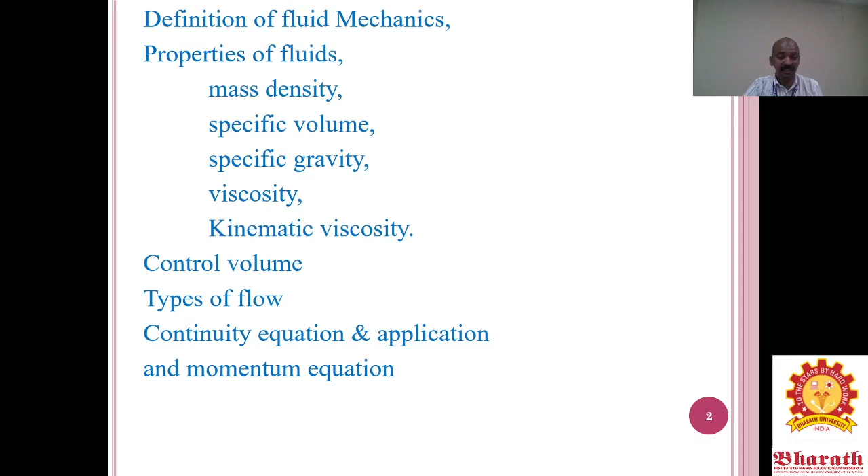Definition of fluid mechanics, properties of fluids: mass density or weight density, specific volume, specific gravity, then viscosity, kinematic viscosity. Based on that we have to do some problems also. Then we discuss the control volume, then flow, types of flow rate, then the continuity equation, and its applications. Based on the applications there will also be some derivations. Then we have to do many problems on this topic, and finally we discuss the momentum equation.

So first we discuss what is the meaning of fluid mechanics. It is a branch of science which deals with the behavior of a liquid or gas in any form, liquid form, gaseous form or semi-solid form, at rest as well as in motion. The main three branches of fluid mechanics deal with statics, kinematics, then dynamics.

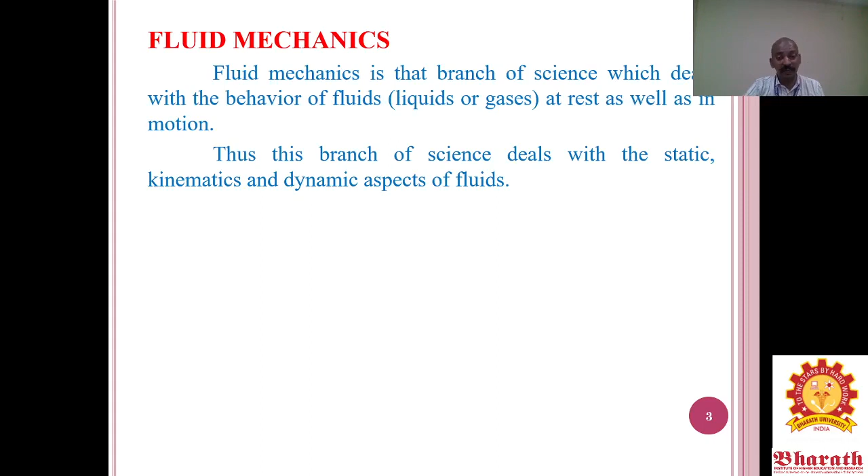Statics means the fluid is at rest. For example, the dam is closed; that is considered fluid statics. When the dam is opened, and we don't consider the pressure, that is fluid kinematics. If the pressure force is considered, that portion is called fluid dynamics.

So normally dam water in a closed containment is fluid statics. Next, the dam being open means fluid kinematics. Then the last one is fluid dynamics. That means the water tank with the tap open. In that water tank, at the outlet from the tank, there is one vertical pipe. The top of that pipe is open to the atmosphere.

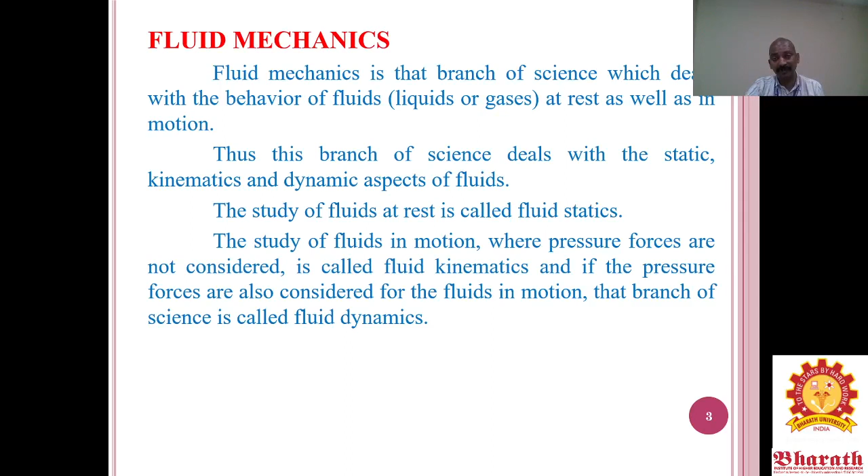So pressure is also considered. If you consider the pressure for that liquid, that is called motion, and that is called fluid dynamics.

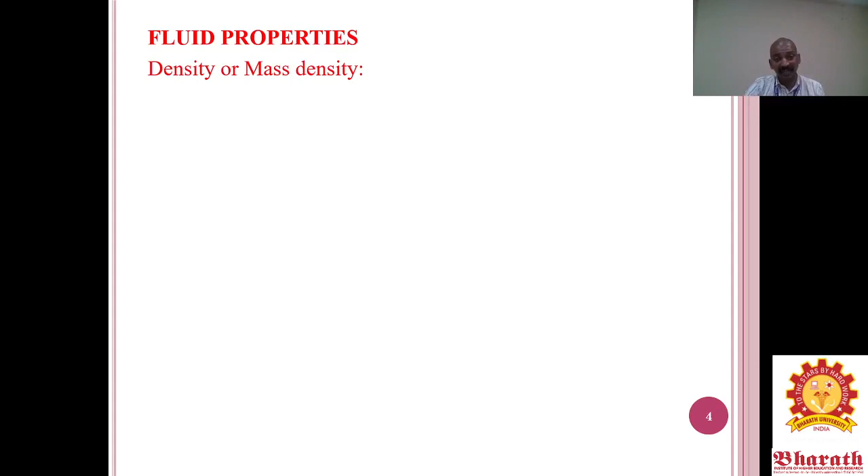The next one, we discuss the fluid properties. First we discuss density or mass density. It is defined as the ratio between the mass of the fluid to its volume. You have to check how much capacity is available in that liquid. Based on a 1 meter cube volume, how many liters will be available; based on that we find it. That is called mass density.

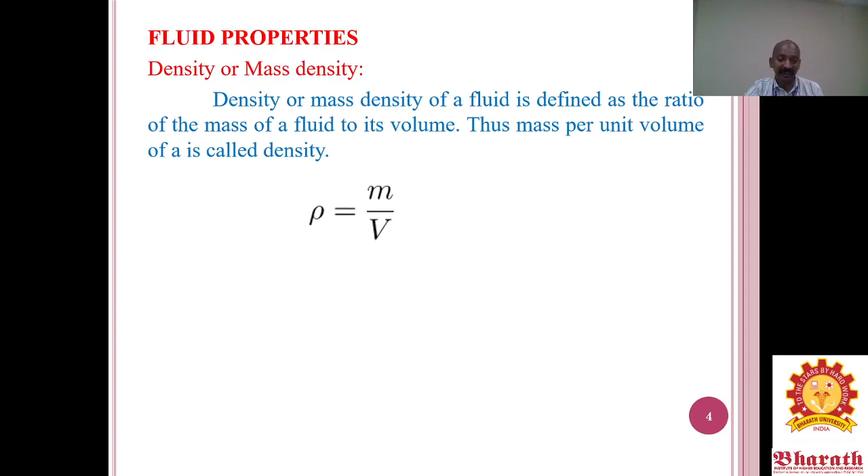It is denoted as rho. The unit of density is kg per meter cube. In formula form, density is equal to mass by volume. Mass is m and volume is v. Density is denoted as rho: rho equals m divided by v. So the SI unit for mass density is kg per meter cube.

Any fluid, in liquid or gaseous form, has some density. For density we take a standard liquid; we consider water as the standard liquid. The density of water is 1000 kg per meter cube. So how is 1000 kg per meter cube calculated?

You have to consider the volume: length, breadth and height. Consider 1 meter length, 1 meter breadth and 1 meter height. Then the weight of that water is 1000 kg. For 1 meter cube, the weight of the water will be 1000 kg. So the density of water is 1000 kg per meter cube.

Likewise, consider any liquid, either petrol or diesel. In petrol bunks they have rules: you have to check it daily and update the density value in the machine.

Okay, so sometimes it is 814 or 818 or 838 or 840, like that the petrol density value will be available. Like that the diesel density also will be changed. So here we consider the liquid form.

The next one we consider for the gaseous form. For gas, the standard fluid we have to consider is air. So the density of air is 1.27 kg per meter cube. Okay, so the dimensional form will be discussed later. Already you studied it in the physics subject in previous classes.

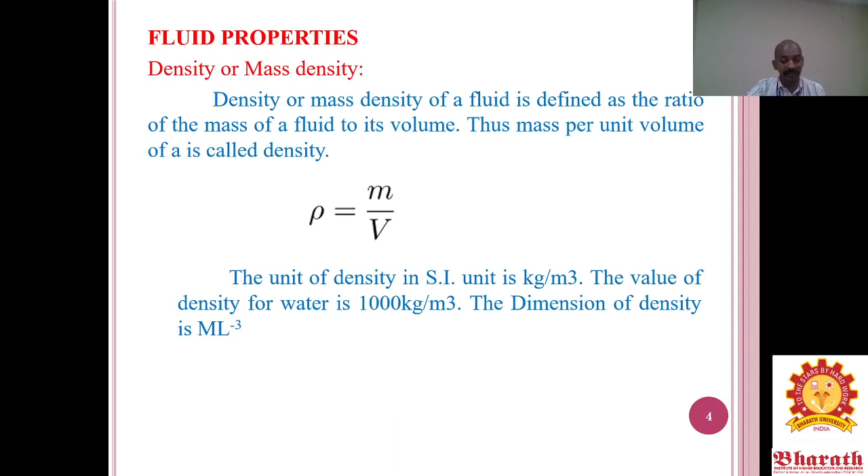Okay. Then next we have to discuss the weight density. It is a ratio between the weight of the fluid to its volume. So how much weight will be available per unit volume. Based on that, W is equal to rho into g, like that directly it will be written. So rho is the density. Density means mass by volume.

So mass of the fluid into gravity divided by volume of the fluid. Okay, so it will be denoted as W: weight density is equal to weight of the fluid divided by the volume of the fluid, that is equal to mass of the fluid into gravity divided by the volume of the fluid. The unit: weight is Newton, mass is kilogram, into gravity that will be converted into Newton, divided by meter cube.

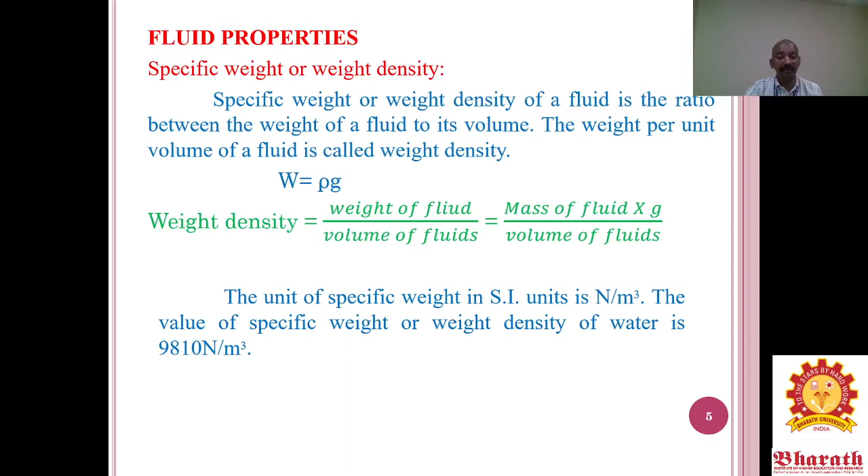Normally the weight density of water is 9810 Newton per meter cube. Then next one is specific volume. It is the volume occupied by a unit mass of the fluid. So it's the opposite of density, 1 by density. Normally density means mass by volume, but specific volume is volume by mass. So 1 by rho. The unit for this is meter cube per kilogram.

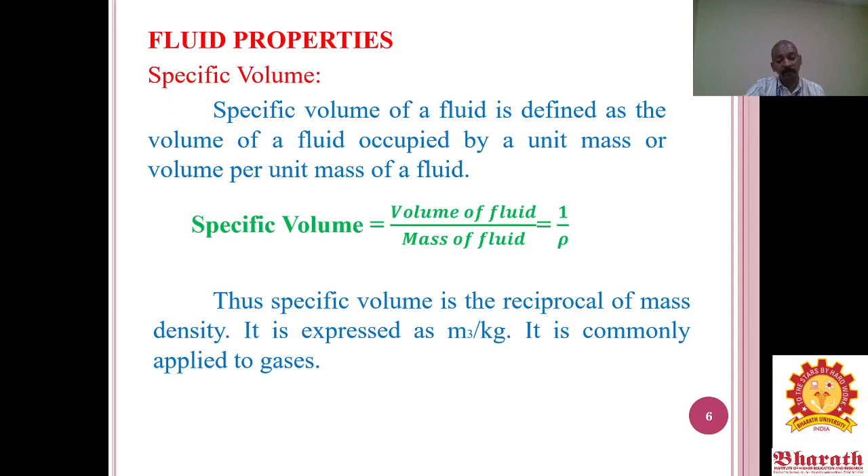It will be applied only for gas. Already I told it. So density of air means 1.27 kg per meter cube. Okay, so like that also you have to consider.

Next one, specific gravity. It is a ratio between the weight density of the fluid to the weight density of the standard fluid. It is not compulsory to use weight density; you can consider the density of the fluid to the density of the standard liquid. Already I told it, the standard density is 1000, we consider water. It will be denoted as S. S is equal to density of the fluid divided by the density of standard liquid.

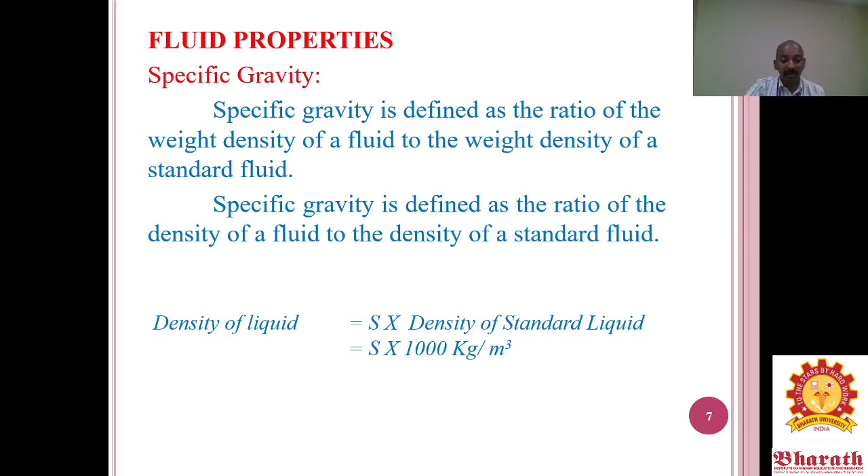So here we have to do the cross multiplication. Density of the liquid is equal to S into density of the standard liquid. The standard liquid we consider as water, and the density of water is 1000. So the density of the liquid is equal to S into 1000 kg per meter cube. Based on that we will do one problem.

In this problem, calculate the specific weight, density and specific gravity of 1 liter of a liquid which weighs 7 Newton. First we have to write the given data. Volume is equal to 1 liter. Weight is equal to 7 Newton. Here we have to calculate specific weight, density and specific gravity.

Okay, so first we calculate the specific weight, denoted as W. W is equal to weight by volume. The weight is given as 7, then divided by the volume, which is given as 1 liter. You have to convert liters to meter cube. So 1000 liters is equal to 1 meter cube.

Okay, so 1 meter cube is equal to 1000 liters, which means you have to do the cross multiplication: 1 liter is equal to 1 by 1000 meter cube. As I already told you, you have to consider the length as 1 meter, breadth as 1 meter and height as 1 meter. So the total volume of this one is 1000 liters. Based on that, W is equal to 7 Newton into 1000 by cross multiplication, 7 into 1000. Finally we get the specific weight equal to 7000 Newton per meter cube.

Then second, we have to calculate the density. We already know that specific weight W is equal to rho into g. Here we have to calculate the density, so by cross multiplication, rho is equal to W divided by g. So 7000 divided by g, gravity 9.81. Finally that is equal to 713.5 kg per meter cube.

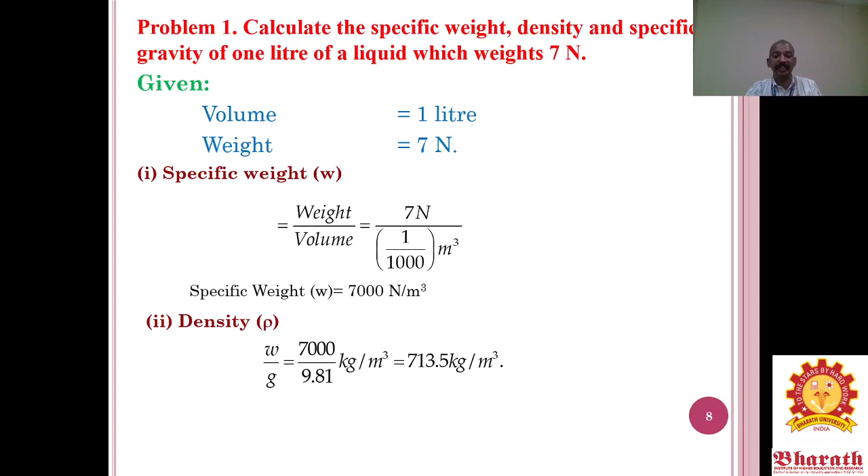Then third, we have to calculate the specific gravity, which we already discussed. Specific gravity is equal to density of the liquid divided by the density of the standard liquid. Here the standard liquid is water. We already found the density of the liquid, 713.5, and the density of water is equal to 1000. So 713.5 divided by 1000 gives the specific gravity of the liquid, 0.7135. It has no unit, because kg per meter cube divided by kg per meter cube cancels out.

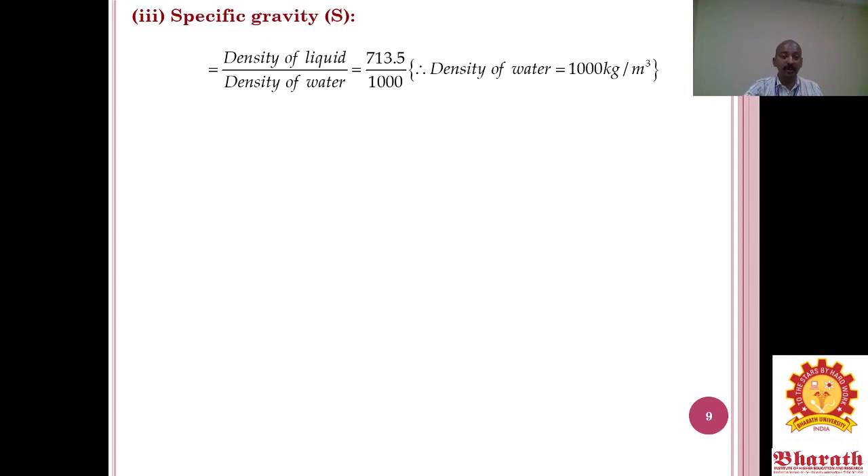First you have to write the given data. The volume is given as 1 liter, which we have to convert to meter cube. 1 liter is equal to 1 by 1000 meter cube, finally converted into 0.001 meter cube. The other data, specific gravity, is given as 0.7.

First we have to calculate the density. The specific gravity is given. Specific gravity of the liquid is equal to density of that liquid divided by the density of the standard liquid, which we consider as water. So 0.7 is equal to density of the liquid divided by 1000. By cross multiplication, the density of the petrol is equal to 0.7 into 1000, that is 700 kg per meter cube. Then the first one is over.

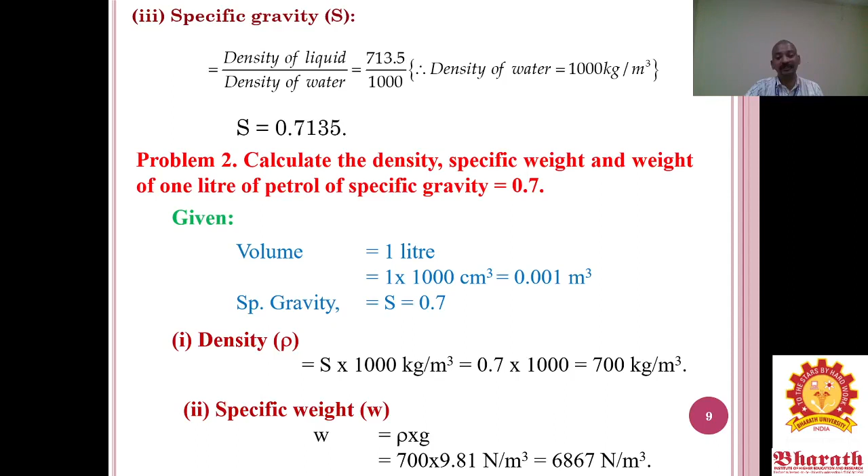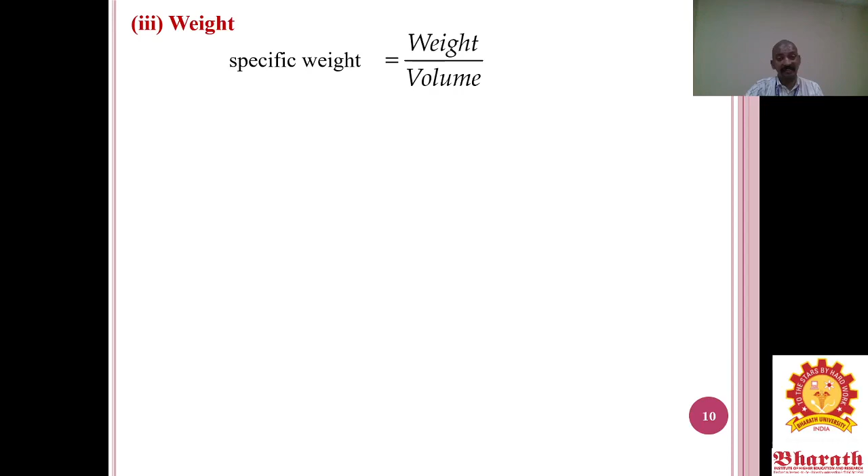Next we have to calculate the weight. How do we calculate the weight? We know the specific weight is equal to weight by volume. The volume is given as 0.001, and we already found the specific weight, 6867. So finally the weight is equal to 6867 into 0.001.

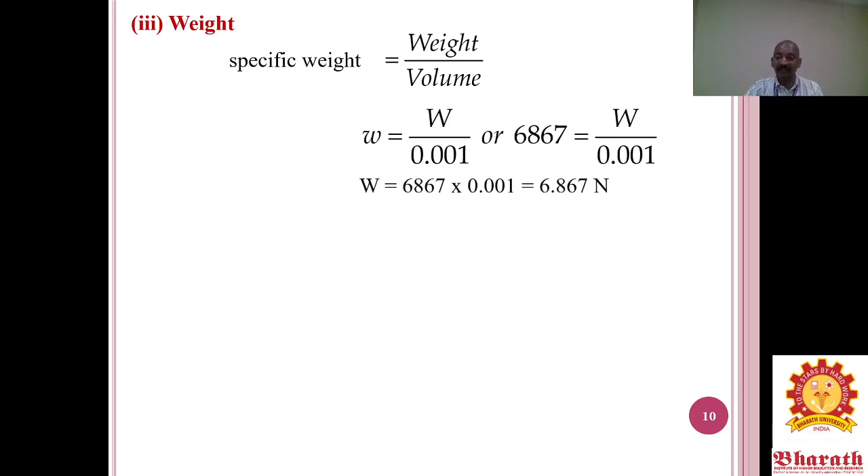Finally, we get that 6.867 Newton. So we complete that one.

Next one, we have to consider the viscosity. Viscosity is defined as the property of the fluid which offers resistance to the movement of one layer. So you have to consider that, based on the layer, the fluid will be added or reduced. So how much distance will be displaced, that will be mentioned as dy. The particular portion will be mentioned as u, so it will be u plus du. I will be showing it in the figure, and based on that we have to calculate.

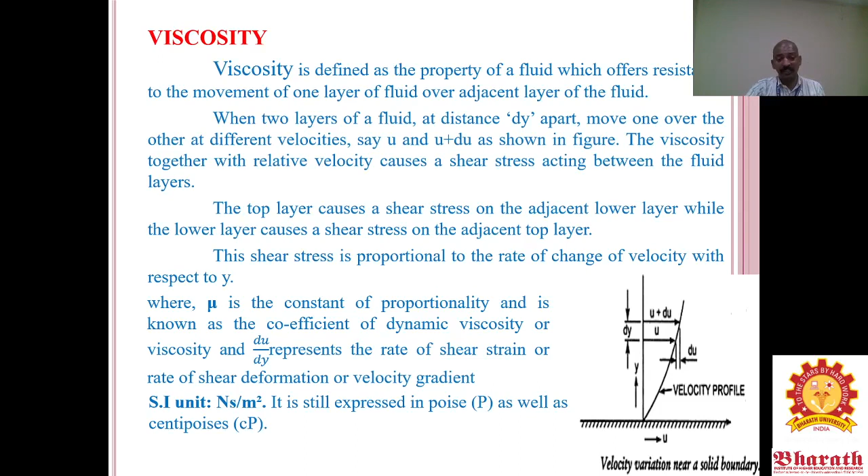Based on the coefficient of that part, tau is directly proportional to du divided by dy, so tau is equal to mu du by dy. Mu is a constant of proportionality, the coefficient of dynamic viscosity or viscosity. Du by dy represents the rate of shear strain. The unit of this one is the poise, or sometimes the centipoise. One centipoise is equal to 1 by 100 poise.

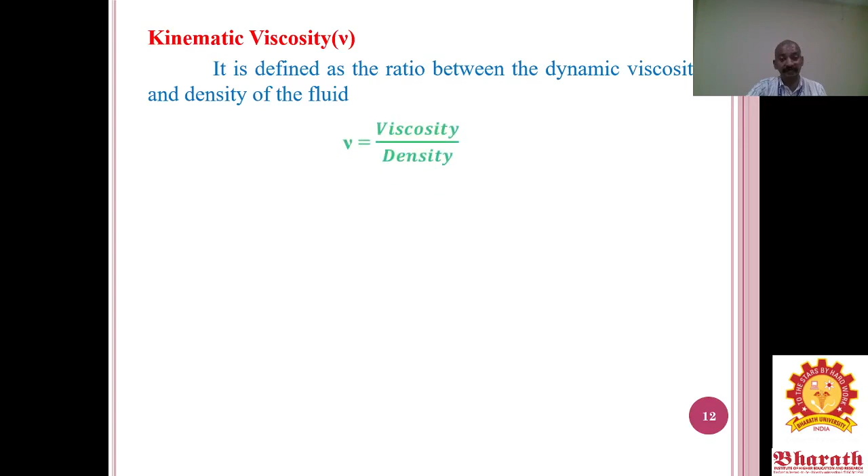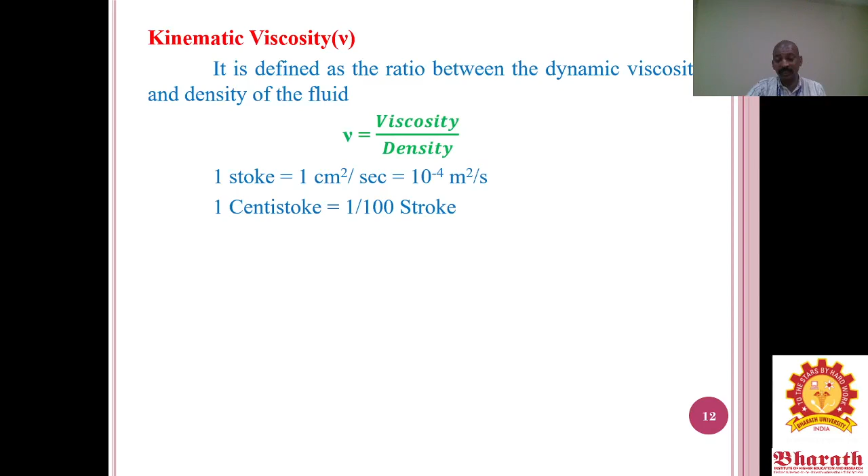The next one is kinematic viscosity. It is the ratio between the dynamic viscosity and the density of the fluid. Small v is equal to viscosity divided by the density. The unit of this one is the stoke. One stoke is equal to 1 centimeter square per second, so 10 power minus 4 meter square per second. 1 centistoke means 1 by 100 stokes. Like that, 1 centipoise is equal to 1 by 100 poise.

The next one is a control volume. Control volume means the liquid will be passing through some particular area, so based on that area we have to consider. It is a fixed volume in space whose size and shape are arbitrarily chosen, through which a fluid is continuously flowing. Once the dam is opened, the liquid will be moving in the river along a particular path or streamline. That flowing liquid is considered the control volume, and the path is considered the control surface, the boundary. The size and shape are normally chosen to enclose the flow of particular interest.

There are around 6 different types of flow. Number 1, steady and unsteady flow. Number 2, uniform and non-uniform flow. Number 3, laminar and turbulent flow. Number 4, compressible and incompressible flow. Number 5, rotational and irrotational flow. And number 6, one, two and three dimensional flow. Now we have to discuss them one by one.

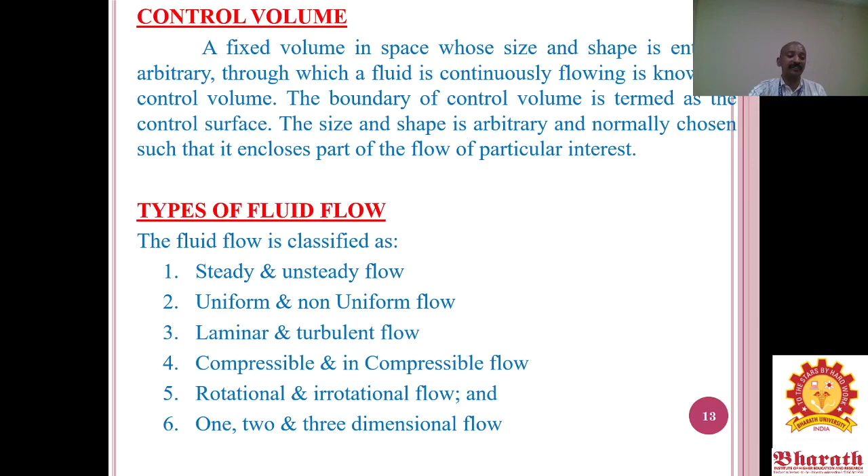First, steady flow and unsteady flow. When fluid characteristics like velocity, pressure, density, and viscosity do not change with time, that is called steady flow. Once the dam is opened, the flow continuously follows the same path, with the same velocity and the same pressure in the river water, and the density also will be the same.

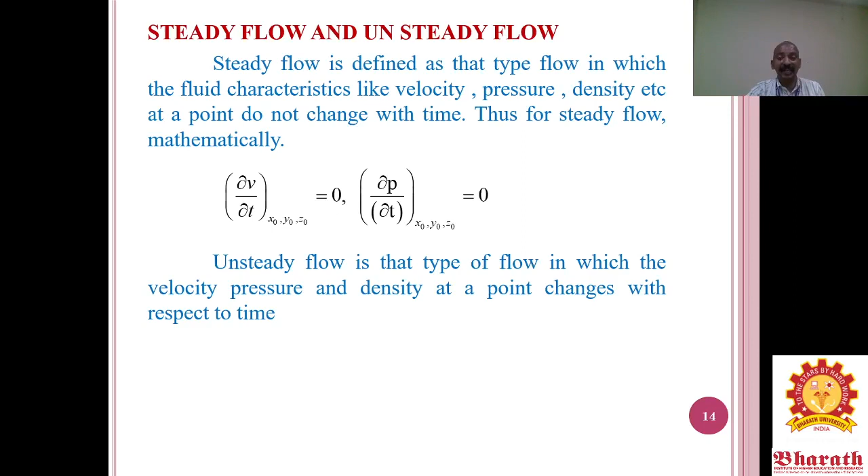So based on that, dou v divided by dou t. Dou v means density, velocity, and dou t means depending upon the time. That is equal to 0. You have to consider that along any axis, x axis, y axis or z axis, everything is constant. Unsteady flow means it changes with respect to time.

For example, you are opening the water tap. When the tank is in filled condition, the pressure will be larger. When it is nearer to the empty condition, the pressure will be reduced. So depending upon the time, that will be changed. So dou v divided by dou t is not equal to 0. That will be considered unsteady flow.

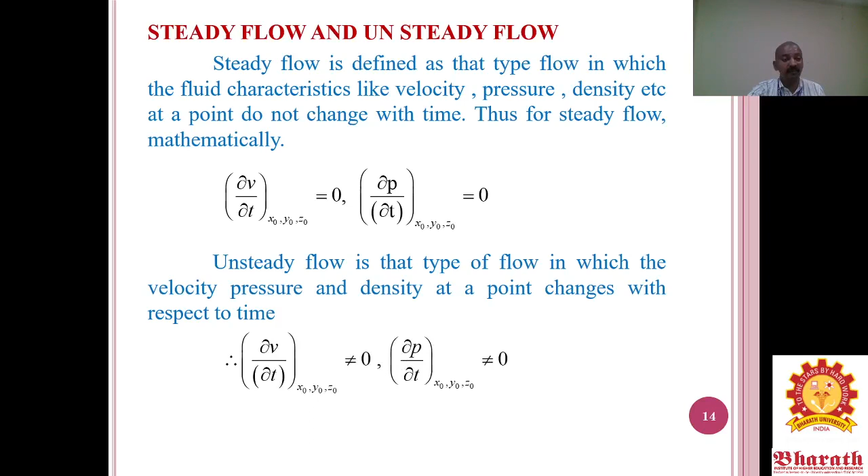Okay, then non-uniform flow. It is a type of flow where the velocity at any given time changes with respect to space. In mathematical form, ∂v/∂s. We already discussed that ∂v means change of velocity. ∂s means the length of flow in the direction, so how much length the liquid flow travels.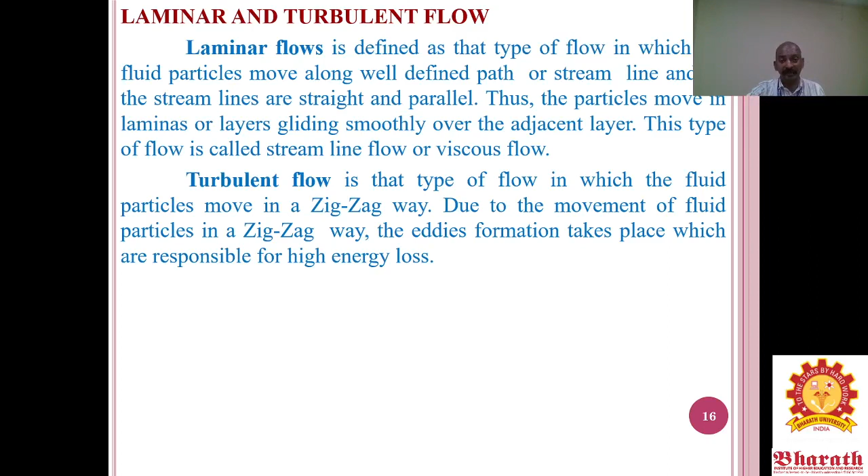Okay, that value may be less than 2000 or more than 4000, whatever it is. If the value is less than 2000, you have to consider it a laminar flow. Okay, if it is more than 4000, the liquid flow is a turbulent flow. Sometimes the value is between 2000 and 4000. That means the liquid flow may be either one, laminar flow or turbulent flow.

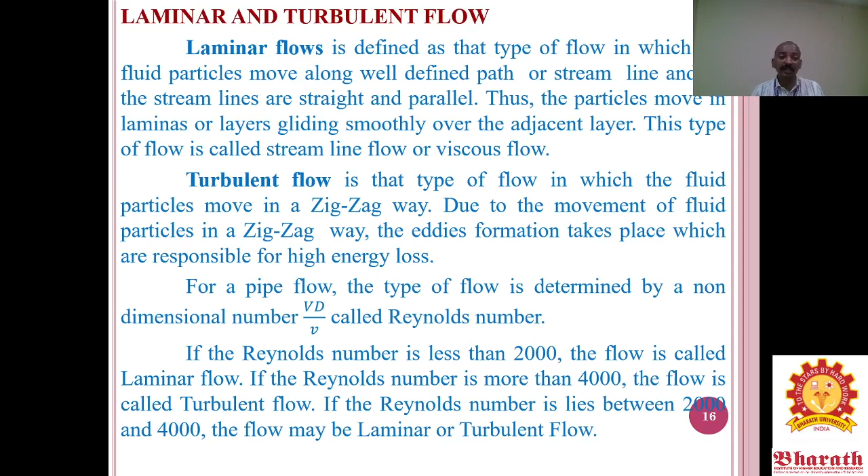Okay, next we have to discuss rotational and irrotational flow. Rotational or irrotational flow means the streamline on that path is available only in particular areas, based on that axis. For example, consider the washing machine. In rotational flow inside the washing machine, the liquid is circulating, whirling inside.

Okay, then based on the axis is irrotational flow, that is sea water. It is individually rotating, and at the same time it moves along the axis also. Okay, but in the washing machine it only moves inside the drum. So that is considered rotational flow. The example is a washing machine. For irrotational flow, the example is sea water.

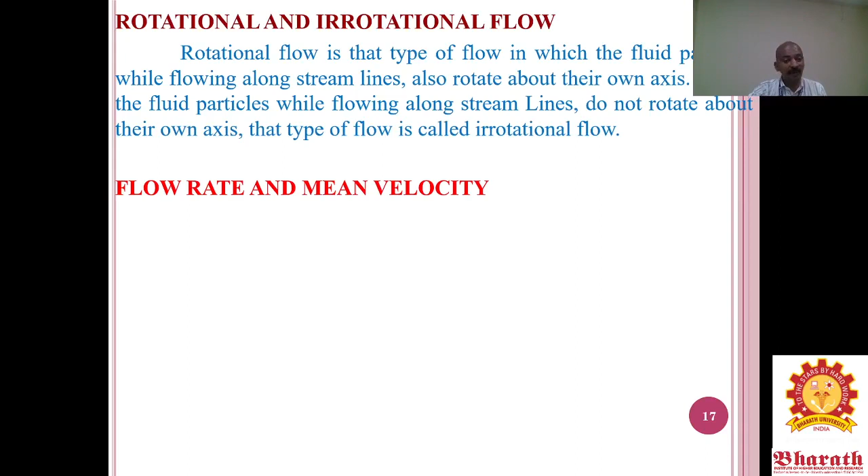The next one, flow rate and mean velocity, sometimes called discharge. Any name can be given. It is how much quantity of fluid flows per second through a particular pipe or particular section. So based on that we have to do it. The particular section means the circular pipe or cross-sectional pipe, or you can consider a square pipe or rectangular pipe.

Consider a circular pipe where liquid travels from a starting point to an end point. We have to calculate how much liquid will flow, considering two points: one with the largest diameter and another with the smallest diameter. The same liquid flows at the starting and ending points, but the diameter may vary - one end smaller or larger than the other. So we have to calculate how much liquid flows through that section.

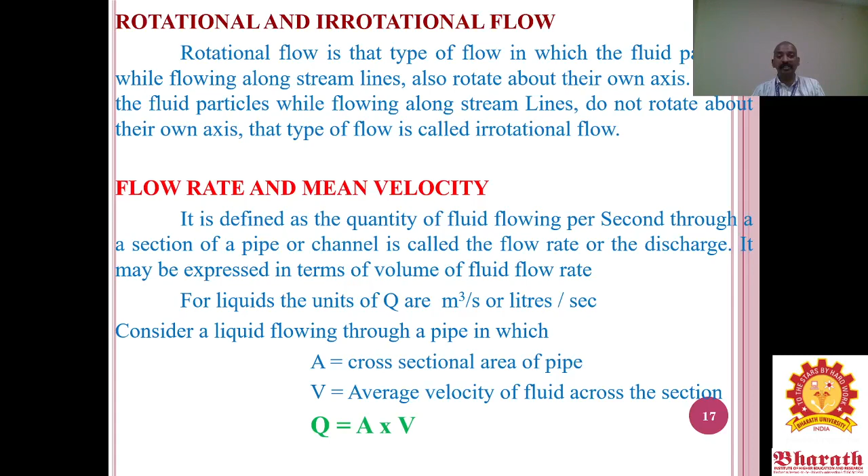For the continuity equation, the total discharge is equal to area into velocity. Area means the area of the cross section at the pipe, and V means the average velocity of the cross section at that particular point. Based on that we have to consider this.

So how do we derive the continuity equation? We consider a tapered pipe where the first section has the smallest diameter and the other end has the largest diameter. I'll label these section 1 and section 2. The same liquid passes through, so the inlet and outlet both have the same water. Based on that, I have to mention the velocity at the inlet.

So the average velocity at cross section 1, then the density of the liquid at section 1, and the area at section 1. Similarly, we do the same for section 2: V2, rho 2, and A2. Based on the principle of the law of conservation of mass, rho 1 A1 V1 is equal to

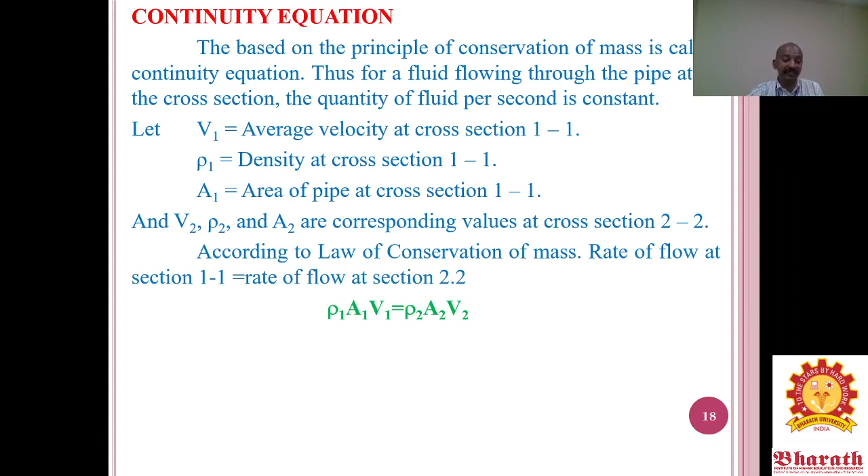rho 2 A2 V2. Since the density of the liquid is the same, rho 1 equals rho 2, so those terms cancel. Finally we get A1 V1 is equal to A2 V2. We can calculate the value for A1, which equals A2 V2 divided by V1. Similarly we can calculate V1, V2, or A2 - any of these values.

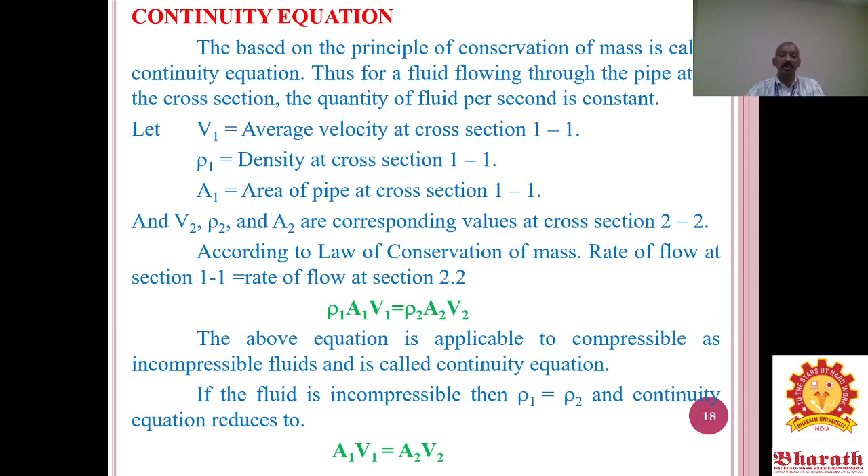Now let's do a problem based on this. The diameter of the pipe at section 1 and section 2: section 1 diameter is 10 centimeters and section 2 diameter is 15 centimeters respectively. We have to find the discharge through the pipe if the velocity of water flowing through section 1 is 5 meters per second, and also determine the velocity at section 2.

Based on that, I have to draw the diagram. The first diameter is the smallest and the second diameter is the largest, so it's a tapered pipe. I'll draw the diagram with section 1 and section 2, writing D1 as 10 centimeters and D2 as 15 centimeters. The velocity of flow through section 1 is 5 meters per second, so V1 equals 5 meters per second.

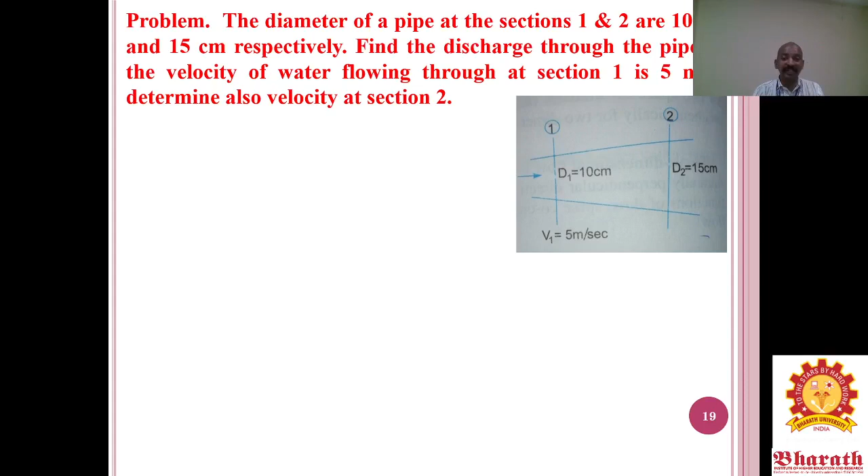Next I have to write the given data. D1 is equal to 10 centimeters, but since velocity is given in meters per second, I have to convert to meters: 0.1 meter. D2 is equal to 15 centimeters, 0.15 meter. Then V1 is equal to 5 meters per second.

In this problem we have to calculate two values. First, discharge, denoted Q. Q is equal to A1 into V1, or A2 into V2 - is there any other formula to use? Second, we have to calculate the velocity at section 2, so we need the V2 value. First we have to calculate the values for A1 and A2.

Since we already know this is a circular pipe, the area for a circular section is pi by 4 d squared. So A1 is equal to pi by 4 times d1 squared, where d1 is 0.1. Finally we get A1 equals 0.007854 meter square. Similarly we calculate A2: A2 is equal to pi by 4 into 0.15 meters squared, giving A2 equals 0.01767 meter square.

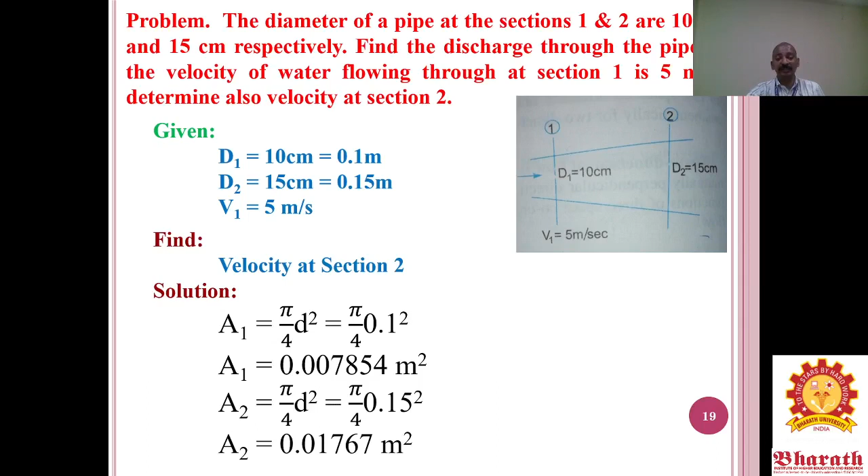Next step, we apply the continuity equation. Q1 is equal to A1 into V1, so with A1 value of 0.007854 into 5, we get Q1 equals 0.03927. Since we know the continuity equation Q1 equals Q2, Q2 is equal to A2 into V2. So here we calculate V2: V2 is equal to Q2 divided by A2.

So V2 is equal to 2.22 meters per second.